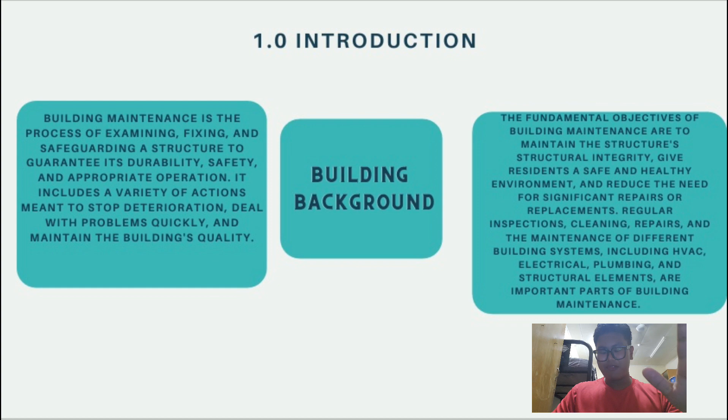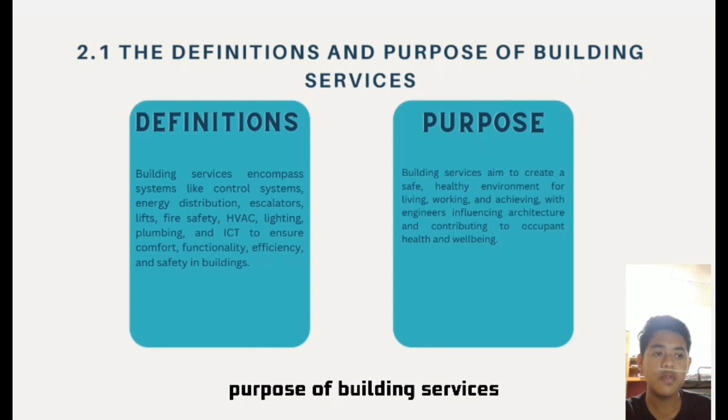Definition of building services: building services encompass systems like control systems, energy distribution, escalators, lifts, fire safety, HVAC, lighting, plumbing, and ICT to ensure comfort, functionality, efficiency, and safety in buildings. Purpose of building services: building services aim to create a safe, healthy environment for living, working, and achieving, while influencing architecture and contributing to occupant health and well-being.

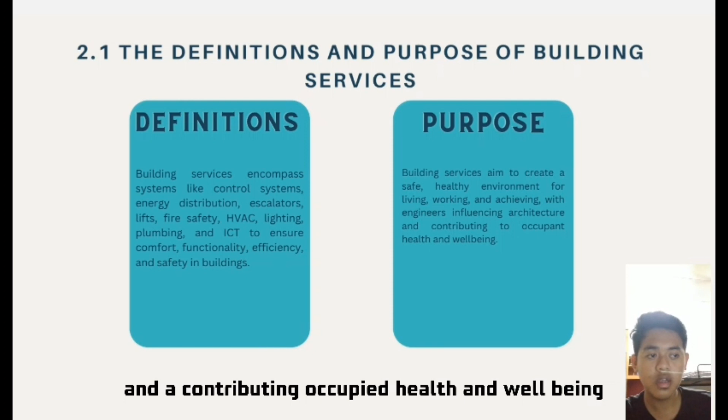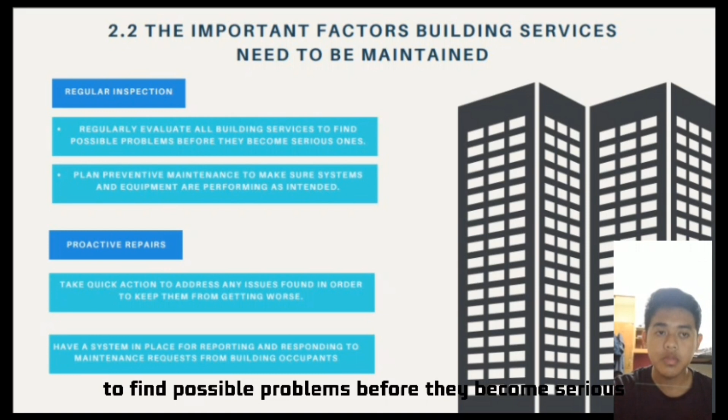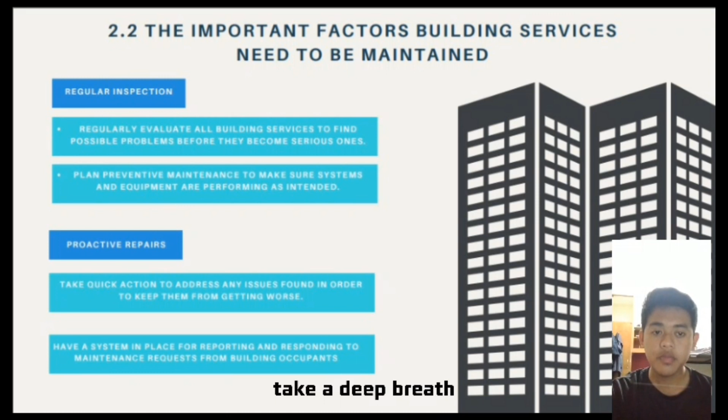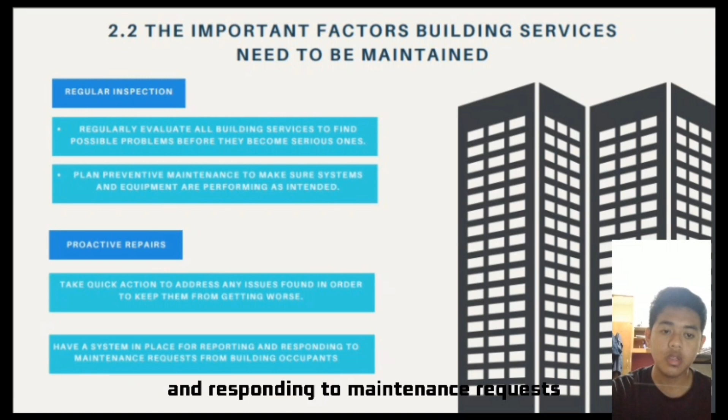Next, the important factors of building services that need to be maintained. Firstly, regular inspection: evaluate all building services to find possible problems before they become serious. Preventive maintenance: make sure the system and equipment are performing as intended. Secondly, proactive repair: take quick action to address any issue in order to keep it from getting worse, and have a system in place for reporting and responding to maintenance requests from building occupants.

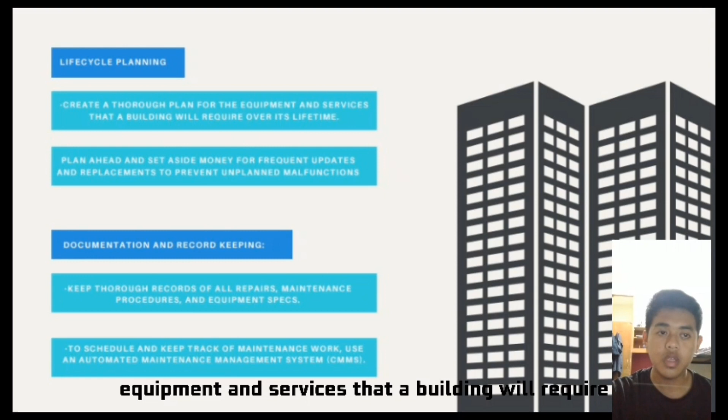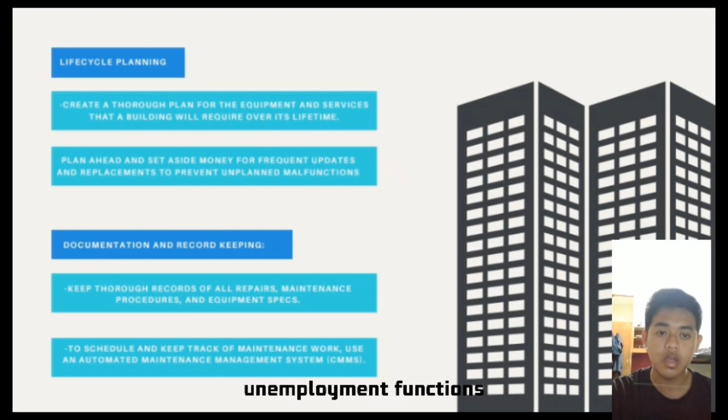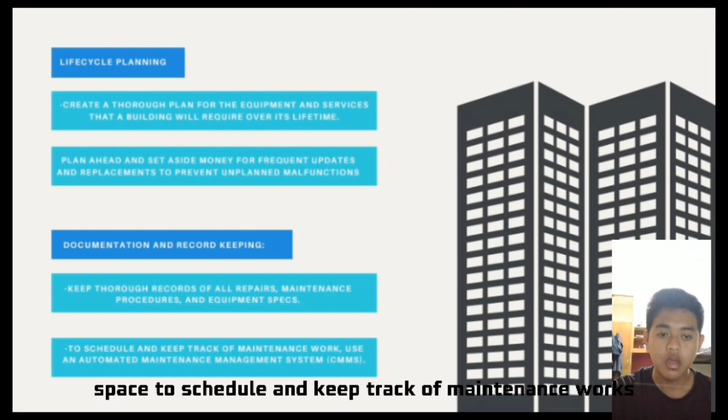Thirdly, life cycle planning: create a thorough plan for the equipment and services that a building will require over its lifetime. Plan ahead and set aside money for frequent updates and replacement to prevent unplanned malfunctions. And lastly, documentation and record keeping: keep thorough records of repairs, maintenance procedures, and equipment specs to schedule and keep track of maintenance works, using an automated maintenance management system, CMMS.

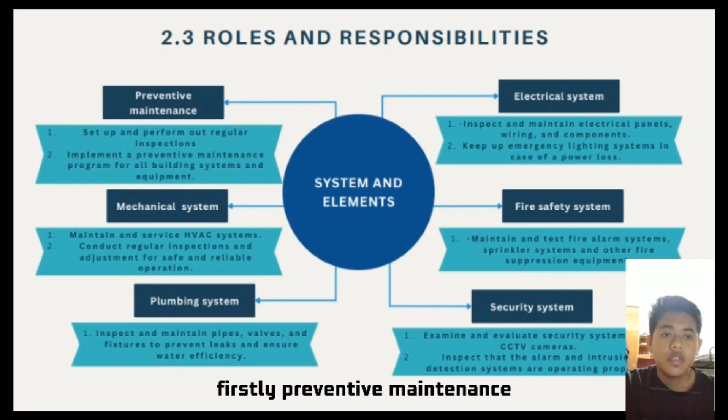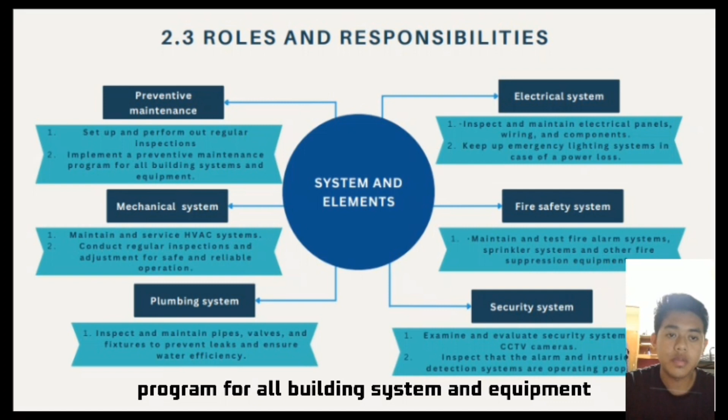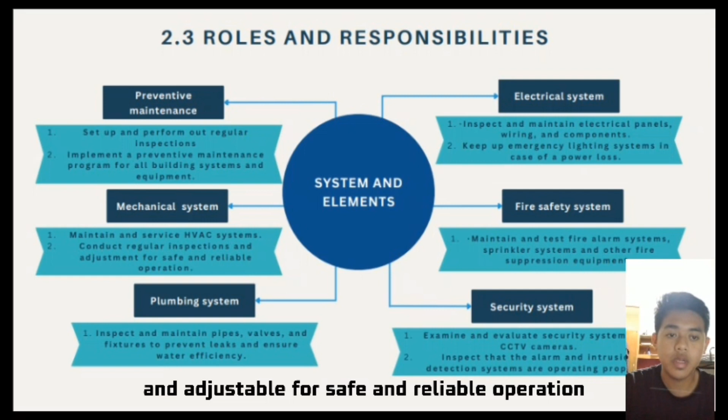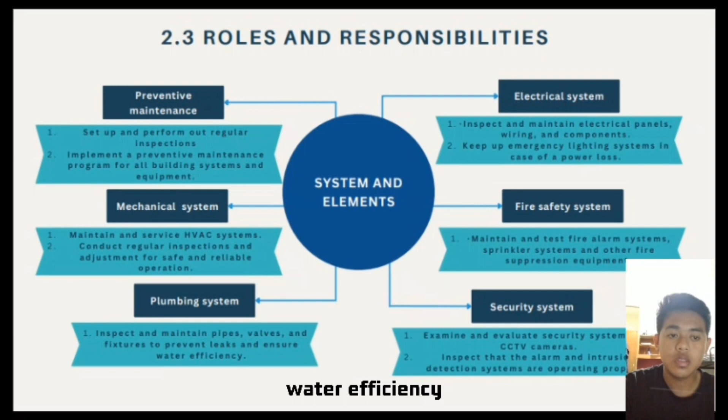Roles and responsibilities of building services. Firstly, preventive maintenance: set up or perform regular inspections to implement a preventive maintenance program for all building systems and equipment. Next, mechanical systems: maintain and service HVAC systems and conduct regular inspection and adjustment for safe and reliable operation. Thirdly, plumbing systems: inspect and maintain pipes, valves, and fixtures to prevent leaks and ensure water efficiency. Next, electrical systems: inspect and maintain electrical panels, wiring, and components, and keep up emergency lighting systems in case of power loss.

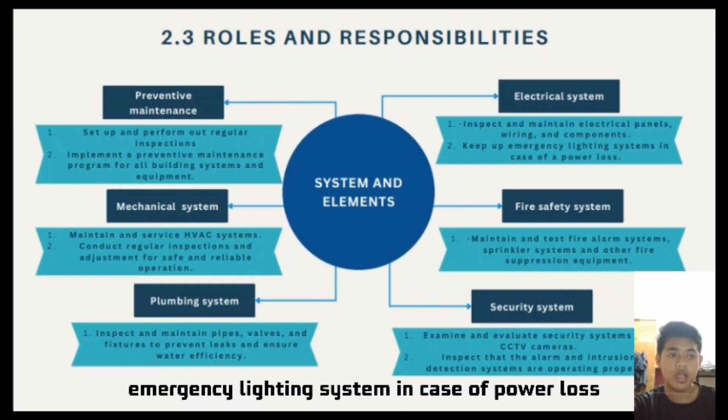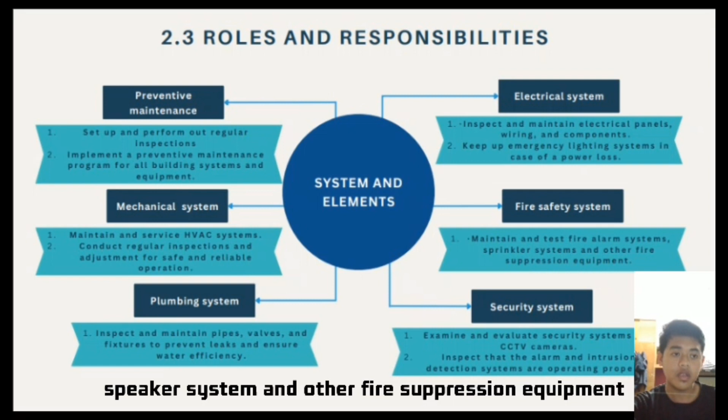Fifth, fire safety system: maintain and test fire alarm systems, sprinkler systems, and other fire suppression equipment. Next, security system: examine and evaluate security systems and CCTV cameras, and inspect that the alarm and intrusion detection systems are operating properly.

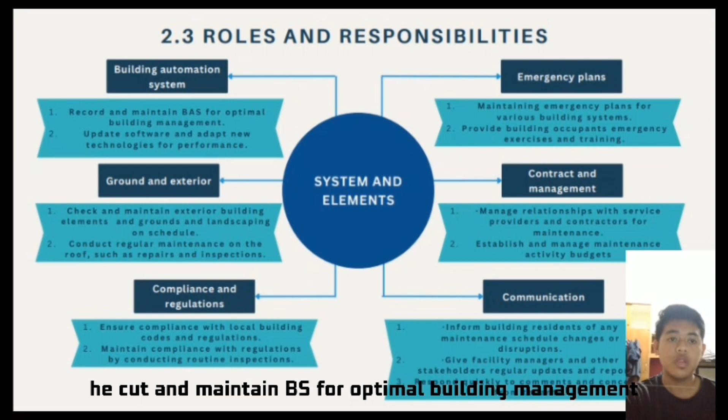The next roles are building automation systems: record and maintain BAS for optimal building management, and update software and adapt new technologies for performance. Ground and exterior: check and maintain exterior building elements, grounds, and landscaping on schedule.

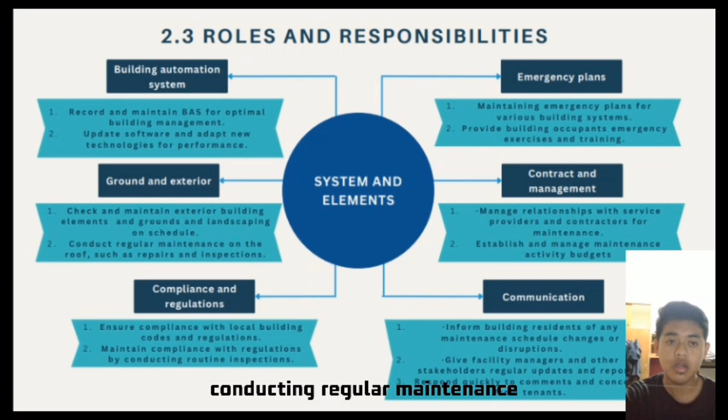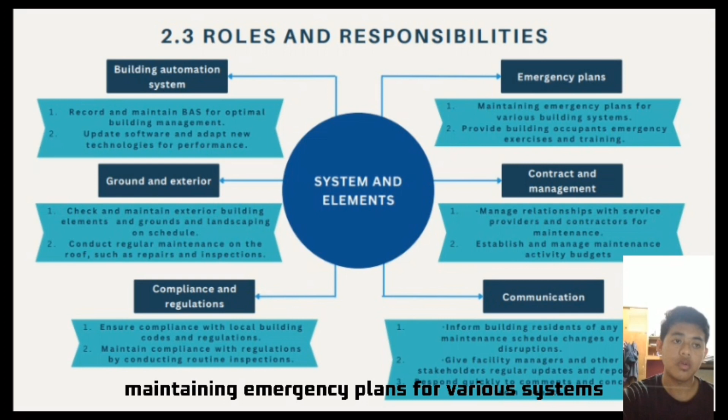Conducting regular maintenance on the roof, such as repairs and inspections. For compliance and regulations: ensure compliance with local building codes and regulations, and maintain compliance by conducting routine inspections. After that, emergency plans: maintain emergency plans for various systems and provide building occupants emergency exercises and training.

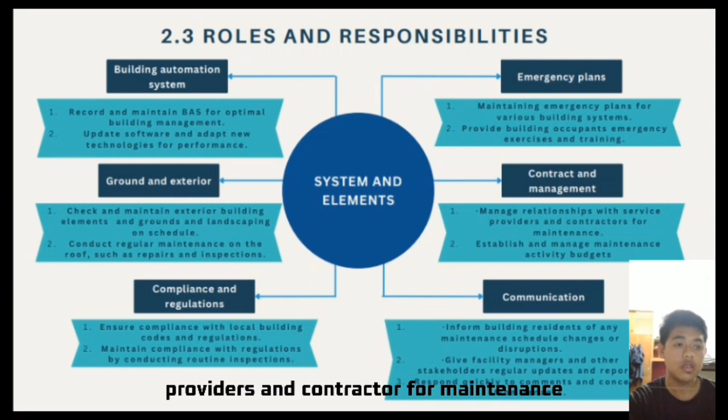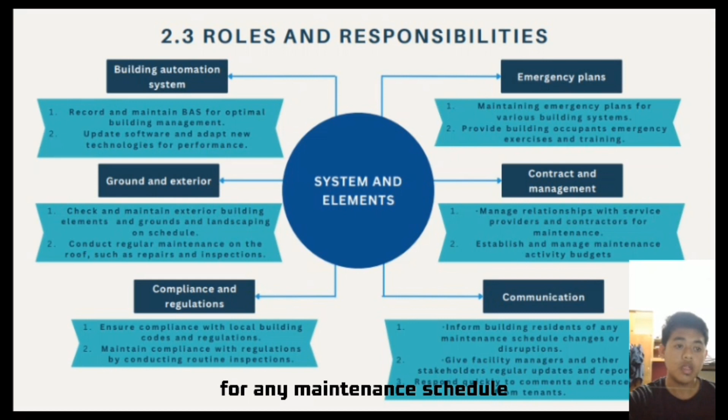Building services are also responsible for contract and management, by managing relationships with service providers and contractors for maintenance, and establishing and managing the maintenance activity budget. Lastly, communication: inform building residents of any maintenance schedule changes or disruptions, give facility managers and other stakeholders regular updates and reports, and respond quickly to comments and concerns from tenants.

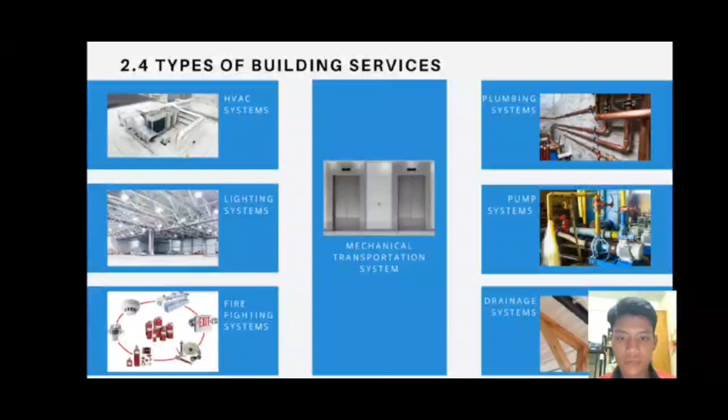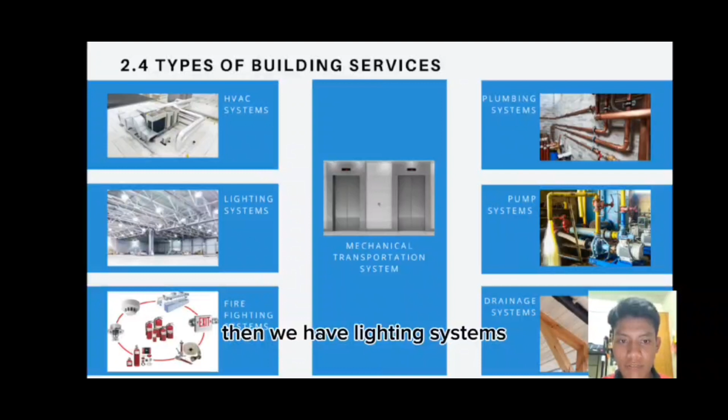Moving on to the next one, these are the types of building services present in Wisma Amphas. For the first one, we have HVAC systems, then lighting systems, firefighting systems, mechanical transportation systems, plumbing systems, pump systems, and drainage systems.

This next slide is an analysis of the lighting and telecommunication systems that are provided by Wisma Amphas. For lighting, there are 7 types of lighting present on the premises, 2 of which are external lighting.

The first lighting type applied in the building is the fluorescent tube lamp. It is used in public spaces of the building such as the prayer room and washrooms.

The next one on the list is fluorescent downlight. This type of lighting is among the common lighting types used in office spaces.

The third is suspended recessed grille lamp. This type of lighting is used in rooms with high ceilings, utilized at the ceiling between the ground floor and the first floor of the building, where the ceiling space is combined.

Fourth is LED panel downlight, which is also utilized similarly to the fluorescent downlight as it is used in office spaces. However, it is a much more energy efficient choice and is therefore more widely utilized within the building.

Last, for the internal lighting, is the false ceiling lamp, which is also an LED light hidden underneath a false ceiling structure. This type of lighting is used in lift lobbies.

For compound lighting, we have the fluorescent lighting, which is set up on the column around the perimeter of the road leading towards the basement underneath the building. Similar to it is the solar LED lighting, which functions the same way, but is more energy efficient.

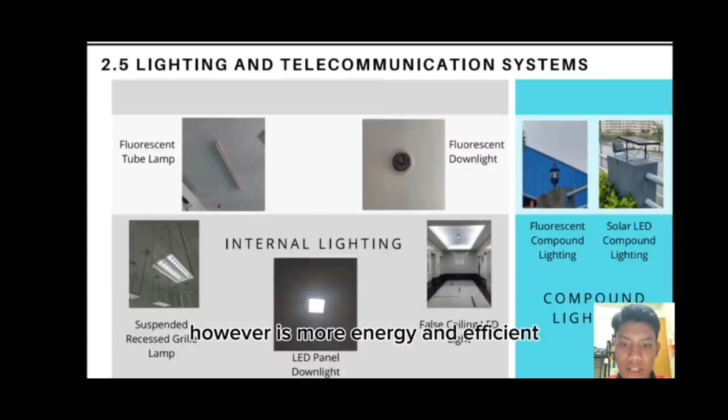Next, for telecommunications, we have VoIP phone, which uses internet connection instead of telephone lines. This can be found in office spaces of the building.

Then we have the PA system, which functions to address the building occupants with any messages that need to be relayed or emergency announcements. It is located in the security room of the building. The messages are relayed through the use of public address system speakers.

Next, we have the office server, which is found in office spaces and is used to store data and share it to the devices owned by each individual company. Following that, the network cable is how the office server transmits and receives its data.

The telco service room is where the infrastructure of the building's internet provider is installed and transmitted through suspended cable trays. The building uses fiber optic telecommunication as its method of network infrastructure. Lastly is the satellite dish, which is used to receive signals from long distances.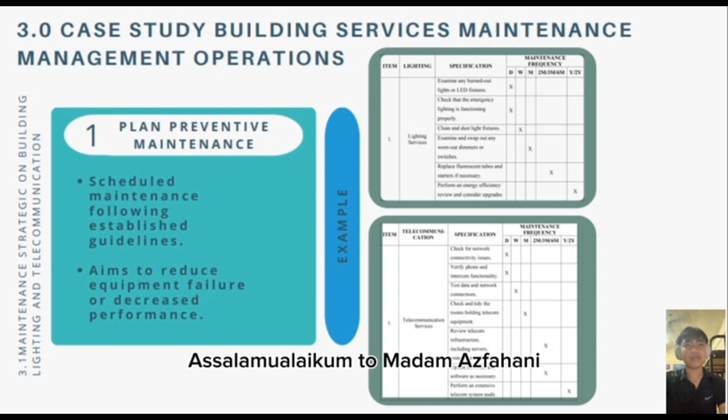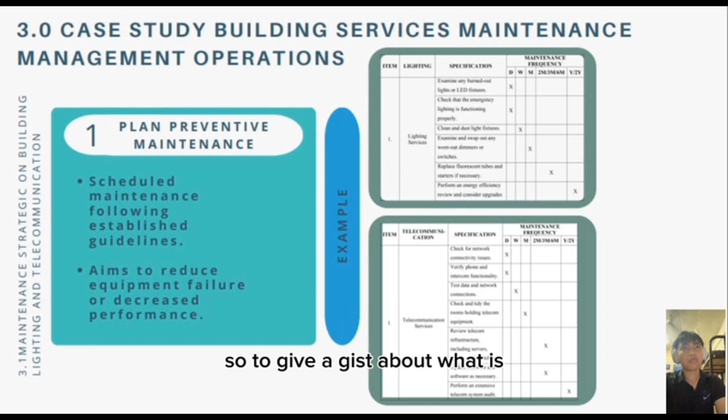3.1 talks about planned preventive maintenance. To give a gist of what planned preventive maintenance is, it is a systematic approach to building management that offers cost savings, extends equipment lifespan, improves reliability, and enhances safety, while ensuring optimal building function and a sustainable built environment. As an example, we've done this for lighting services and telecommunication services.

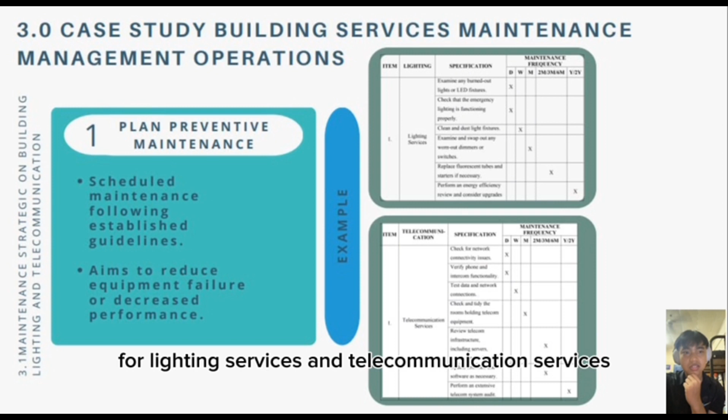We've done this from daily, weekly, monthly, quarterly, and annually. Moreover, Savills implements KPIs, which stands for Key Performance Indicators, to oversee their vendors and workers.

As for the example given, it's a KPI for vendors to ensure that their performance is top-notch, or else they will suffer a penalty as promised in their contracts.

If you look at the KPI rating, we have the excellent one, 90% to 100%. We've reviewed their vendors, and most of the vendors have an excellent rating, so safe to say Savills succeeded with this strategy.

Which KPIs use to gauge the vendors to bring out the performance like they promised in the contracts.

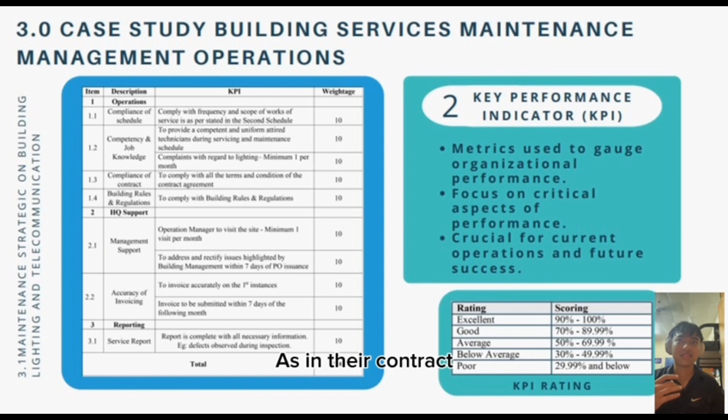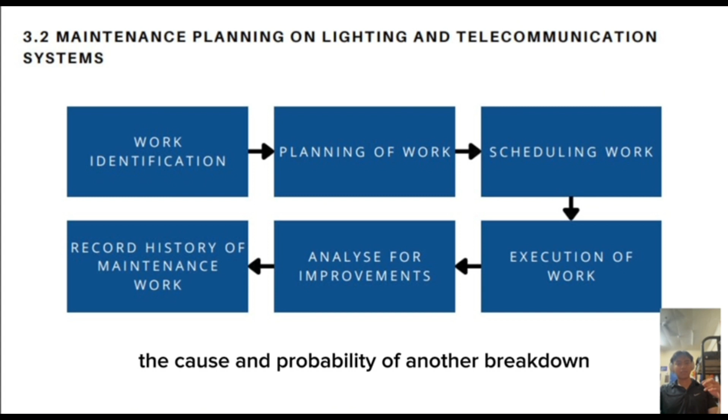They then plan the required process, including hiring outsourced workers and preparing necessary items. The schedule is set outside of proper working hours for the hired workers. The work is executed according to the plan, program, and preparations, and the team analyzes the cause and probability of another breakdown.

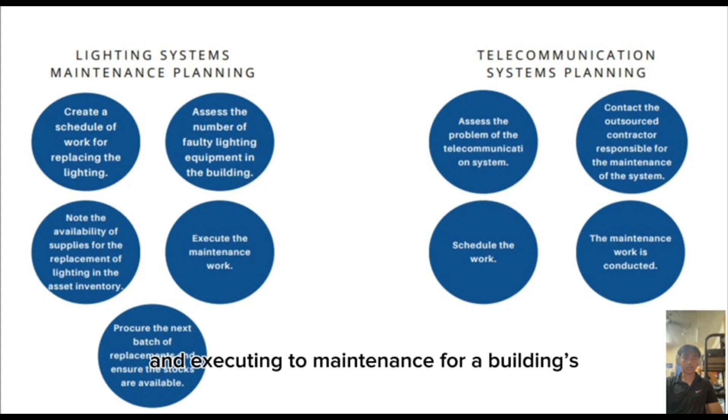The work is recorded for future reference. Next, the process of planning and executing maintenance for a building's lighting system, which is crucial for its longevity, functionality, energy efficiency, and occupant satisfaction.

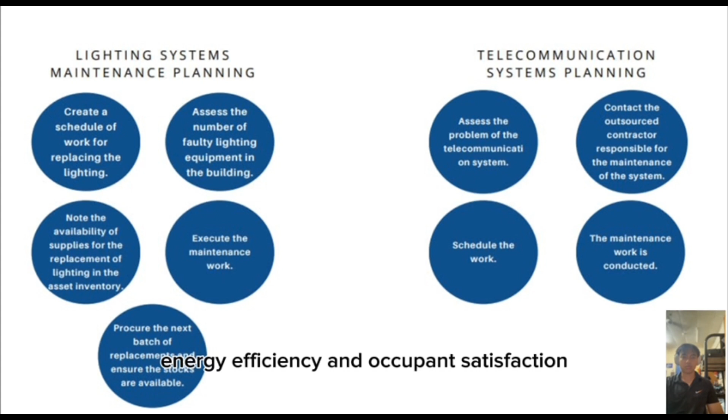The process involves assessing faulty lighting equipment, creating a schedule of work for replacement, checking supplies availability in the asset inventory, and executing the maintenance work.

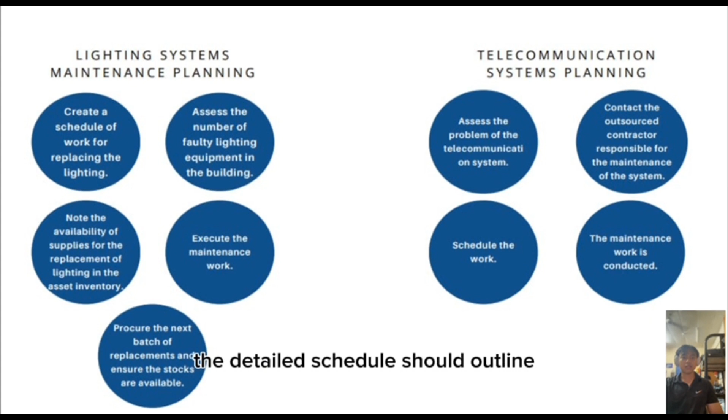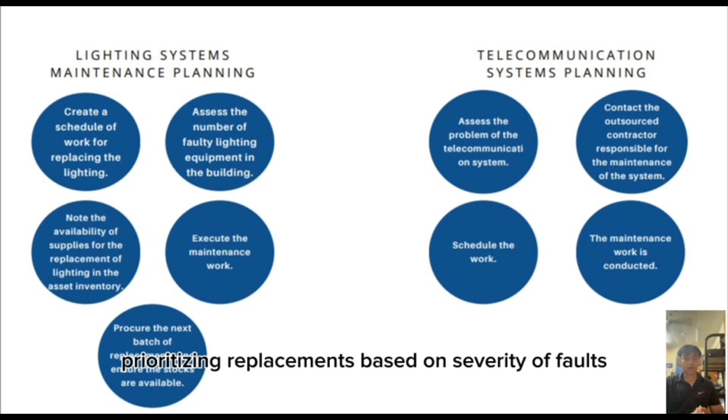The assessment of faulty lighting equipment is the foundation for planning and executing maintenance work. A detailed schedule should outline fixtures needing replacement, their locations within the building, and the timeline for completion. Prioritizing replacements based on severity of faults and criticality of lighting in specific areas is very essential.

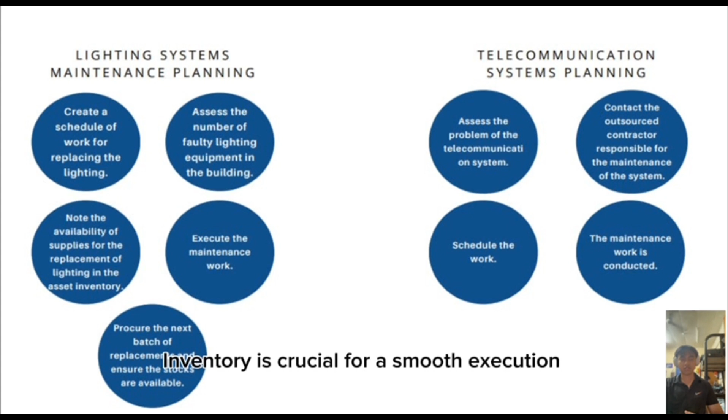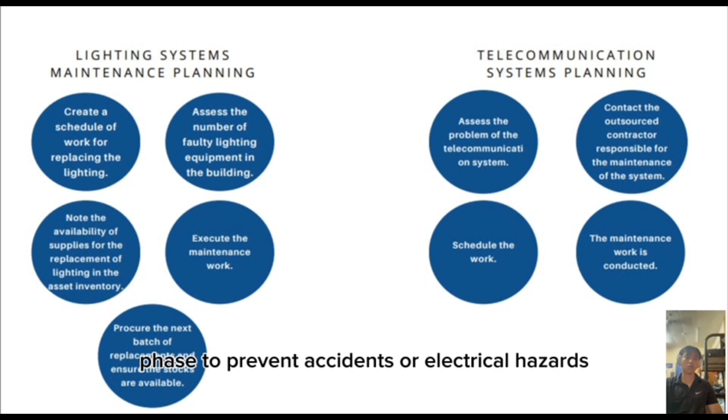The availability of necessary supplies in the asset inventory is crucial for a smooth execution of the maintenance plan. This includes replacing bulbs, fixtures, wiring, and other components. Safety precautions should be taken during this phase to prevent accidents or electrical hazards.

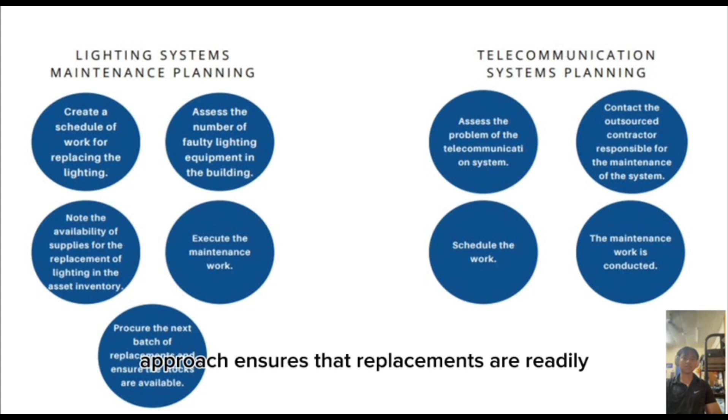After executing the initial maintenance work, it is essential to procure the next batch of replacement lighting equipment and ensure stock availability. This proactive approach ensures that replacements are readily available for future lighting issues.

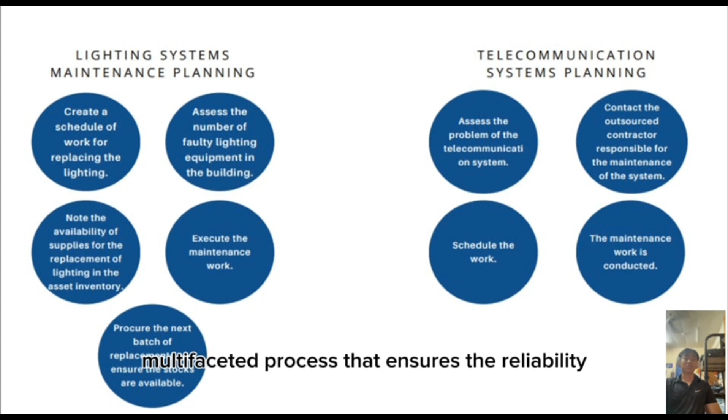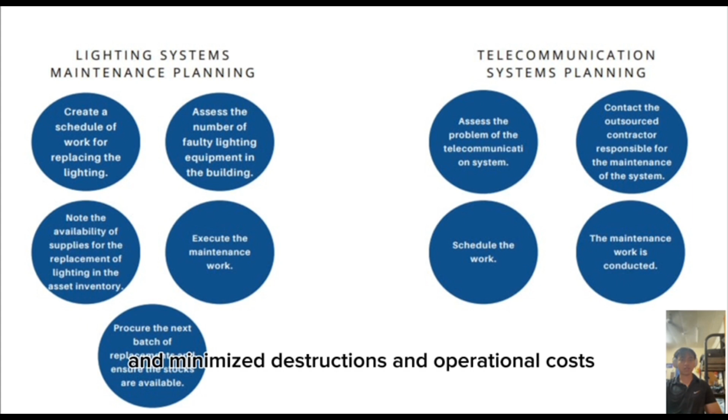To conclude, effective lighting system maintenance planning is a multifaceted process that ensures the reliability and functionality of the lighting system, contributes to energy efficiency, and minimizes disruptions and operational costs. A maintenance program is a strategic plan to ensure the proper maintenance and function of an organization's assets such as machinery, equipment, and infrastructure.

These programs can be created at various organizational levels and applied in various ways. Long-term maintenance programs are structured policies that estimate and manage maintenance costs effectively, addressing backlogs and ensuring the most suitable timing for repairs and improvements. They consider the organization's staffing structure and align maintenance efforts with business policies and building usage decisions.

Medium-term maintenance programs use annual programming to forecast and allocate resources for the coming year, modifying work activities to meet organizational requirements, establishing a consistent workflow, minimizing inactivity, and allocating budgetary resources to specific tasks.

Lastly, short-term maintenance programs involve organizing and executing maintenance tasks within specific timeframes, including inspections and assessments of civil, mechanical, and electric components. Efficient scheduling is very crucial for effective building maintenance.

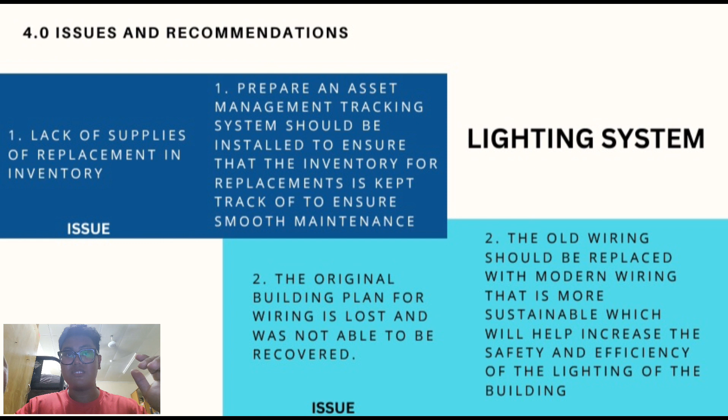In order to guarantee the longevity, security, and functionality of buildings, maintenance services are essential. These services cover a wide range of tasks, including regular maintenance, repairs, and upgrades, all with the goal of preserving the structural integrity of the building and fostering a friendly community for the occupants.

Through the utilization of professional building maintenance services, owners can prevent costly repairs and raise the overall worth of their assets by addressing issues before they become serious ones.

Additionally, well-kept buildings add to a pleasant and appealing environment, giving occupants a sense of pride and making a lasting impression on guests. Essentially, it is impossible to overstate the importance of building maintenance services since they work as a preventative measure for long-term property management, guaranteeing that structures remain sturdy and operational for many years.